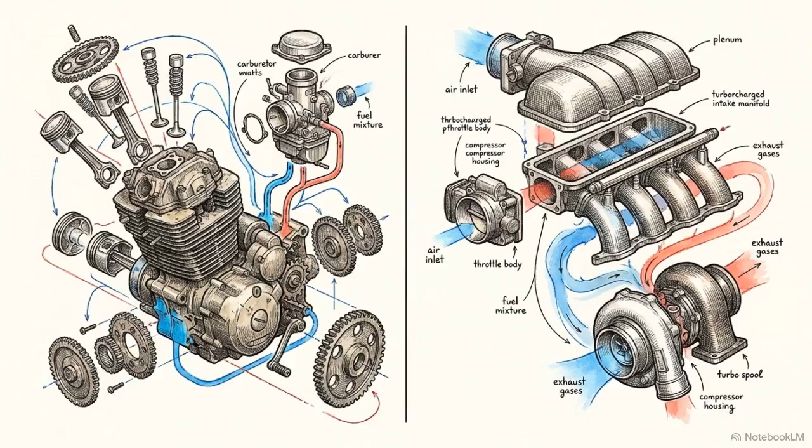The transition to E20 fuel involves modifying the combustion chemistry inside hundreds of millions of vehicles simultaneously, across a fleet ranging from 15-year-old BS3 motorcycles to modern turbocharged SUVs. The physical parameters of this change are strictly defined. E20 is a blend of 20% anhydrous ethanol and 80% motor gasoline.

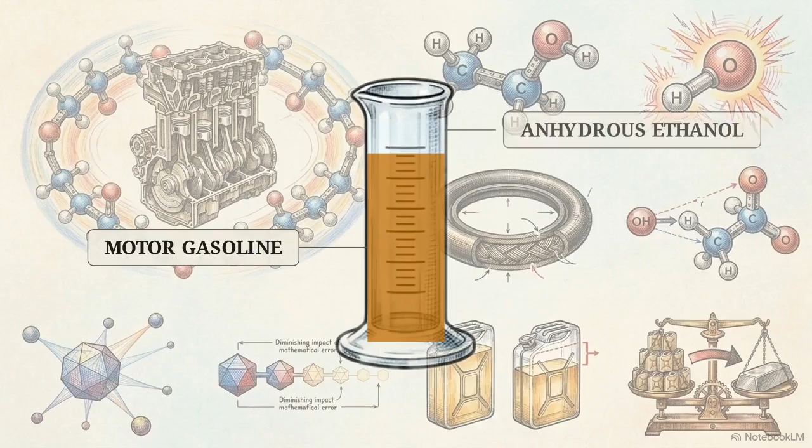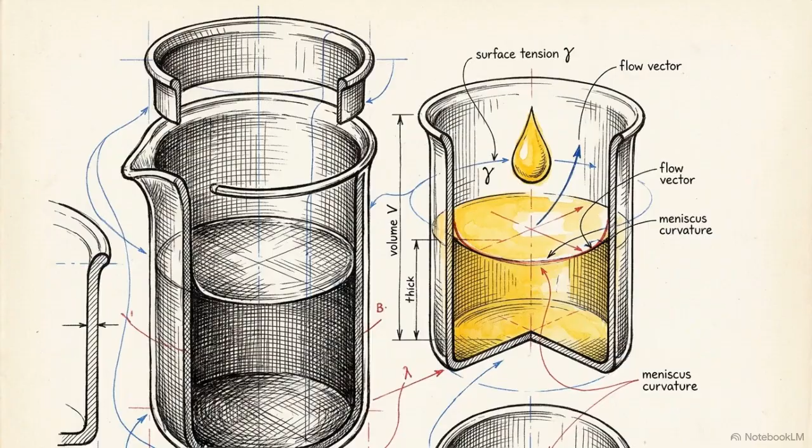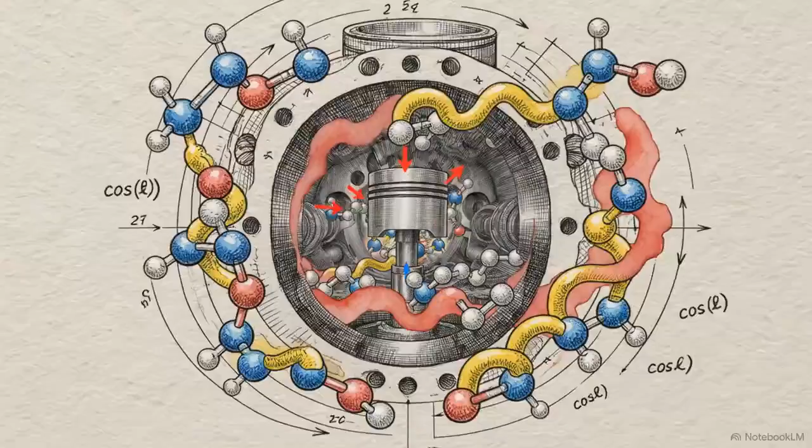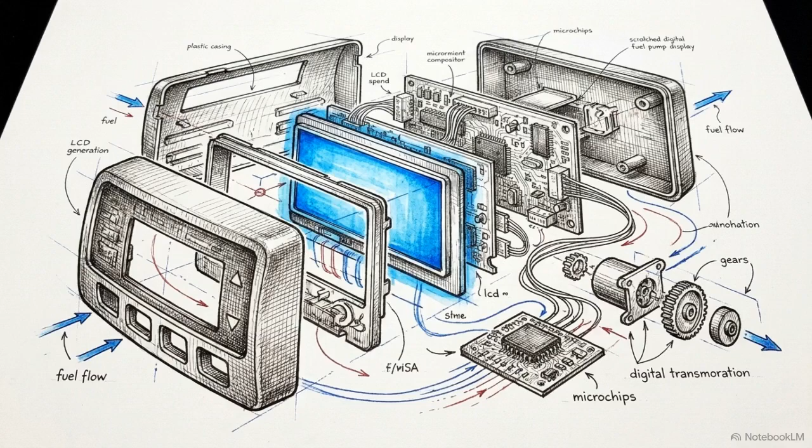To measure the impact of this shift, we have to track the engineering physics from the molecular level up, tracing the kinetics that suppress engine autoignition, the computational models required to simulate them, the physical degradation of the fuel system elastomers, and finally the macroeconomic cost of the thermodynamic penalty.

This rollout operates as a cascade of physical constraints. Every advantage extracted at the molecular level demands a precise, unavoidable penalty at the scale of the national economy.

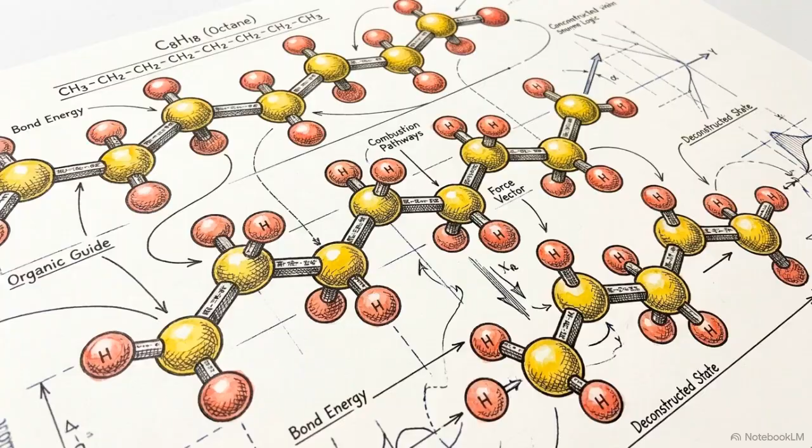In standard gasoline alkanes, low-temperature oxidation drives a volatile process called chain branching. The fuel molecules break apart and flood the cylinder's end gas with highly reactive OH radicals, triggering the spontaneous autoignition known as engine knock. Ethanol interrupts this sequence.

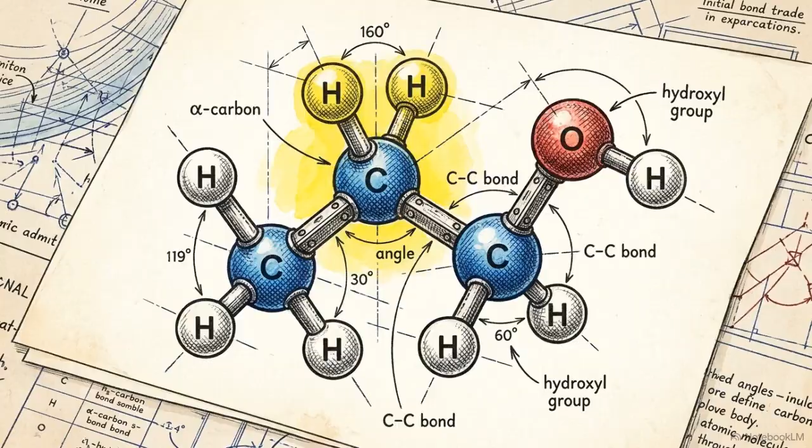Its molecular structure contains a specific vulnerability at the alpha carbon, the carbon atom attached directly to the hydroxyl group, where the carbon-hydrogen bond is notably weaker than the surrounding bonds. Because of this weaker bond, oxidation preferentially attacks the alpha carbon.

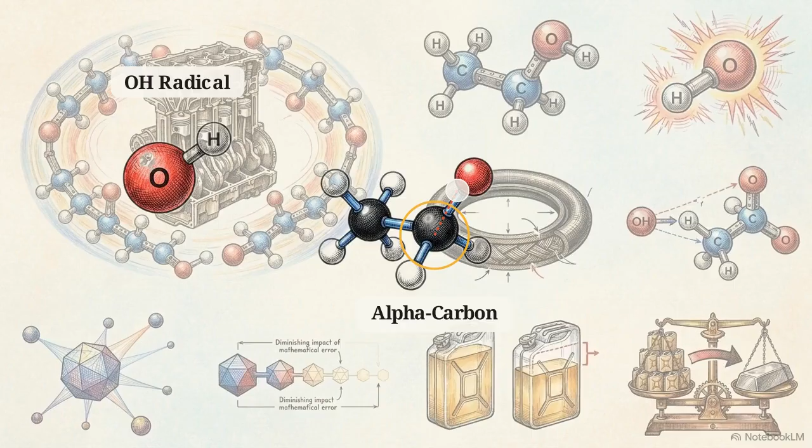When an OH radical encounters ethanol, it strips a hydrogen atom from this site to form an alpha-hydroxyethyl radical. That radical reacts rapidly with oxygen, but instead of branching, it decomposes into acetaldehyde and a single hydroperoxyl radical, or HO2. This pathway serves as a propagation step, not a branching step.

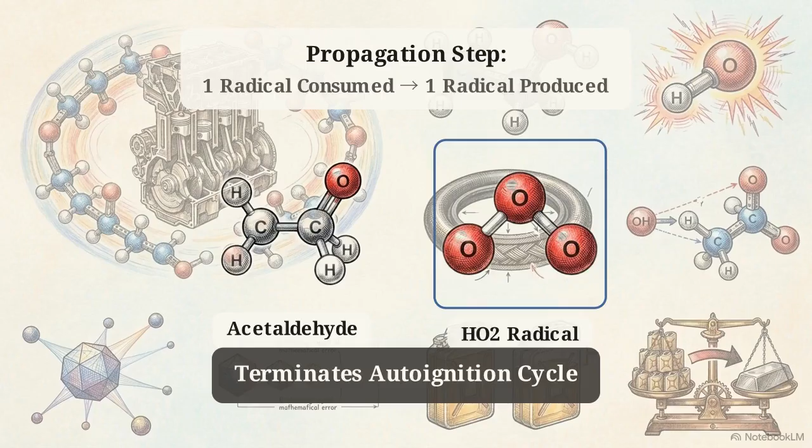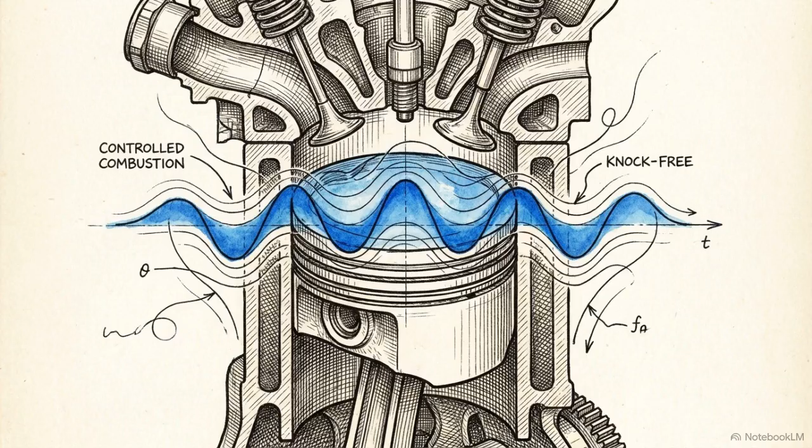It consumes the cylinder's available OH radicals without spawning new ones, which terminates the chain reaction and starves the autoignition cycle. This kinetic architecture is what gives ethanol its 108 octane rating. It acts as an active chemical scavenger, interrupting the combustion sequence to eliminate engine knock.

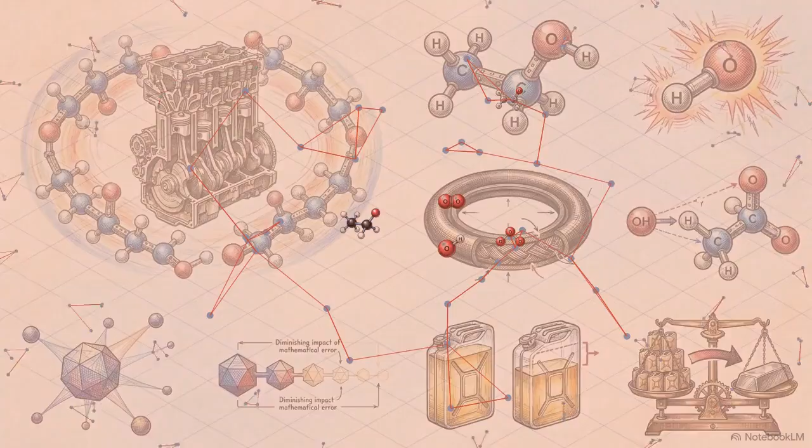To design engines that utilize this scavenging effect, researchers rely on detailed chemical mechanisms like Aramco Mech 3.0, a model mapping 581 species and over 3,000 distinct reactions. Dropping this model into a 3D fluid dynamics mesh would immediately exceed the capacity of modern supercomputers.

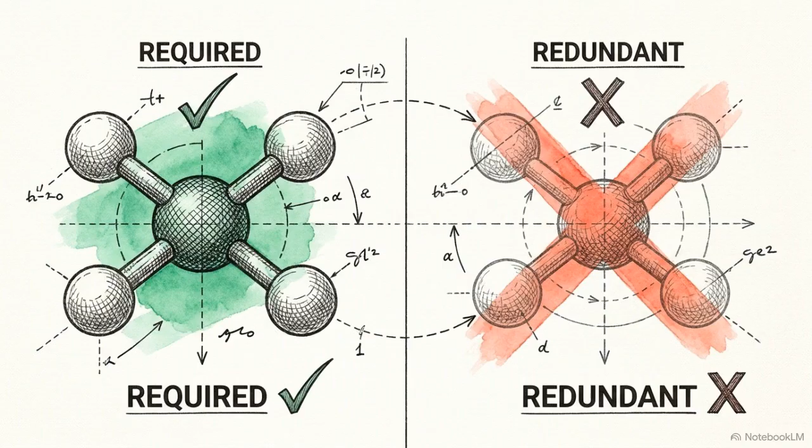Engineers shrink this model using an algorithm called Directed Relation Graph with Error Propagation, or DRGEP, which identifies which reactions are necessary for ignition and which can be removed.

The process begins by calculating a direct interaction coefficient, or RAB, between specific species. This quantifies the exact mathematical error introduced if one species is removed from the network. The algorithm then tracks how that error propagates.

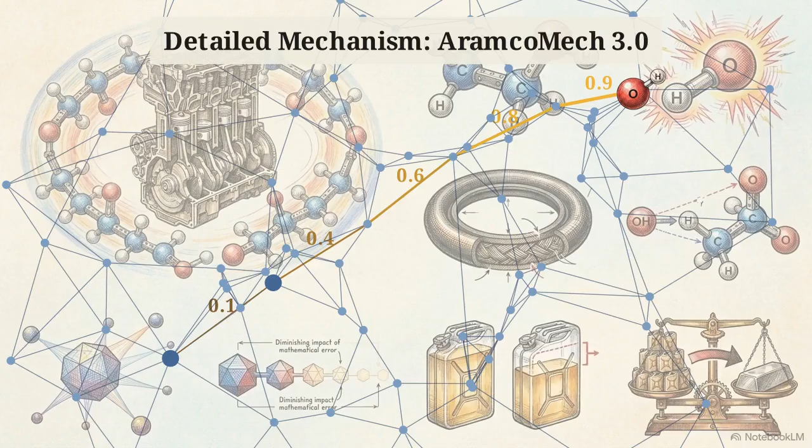As an error multiplies through a chain of intermediate species, its residual impact on the target diminishes, a process known as geometric damping. Once every pathway is mapped, any species falling below a user-defined error threshold is stripped from the model, along with every reaction associated with it.

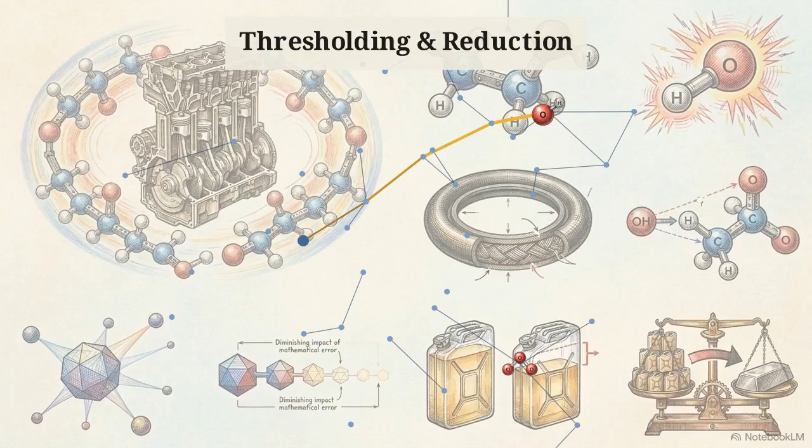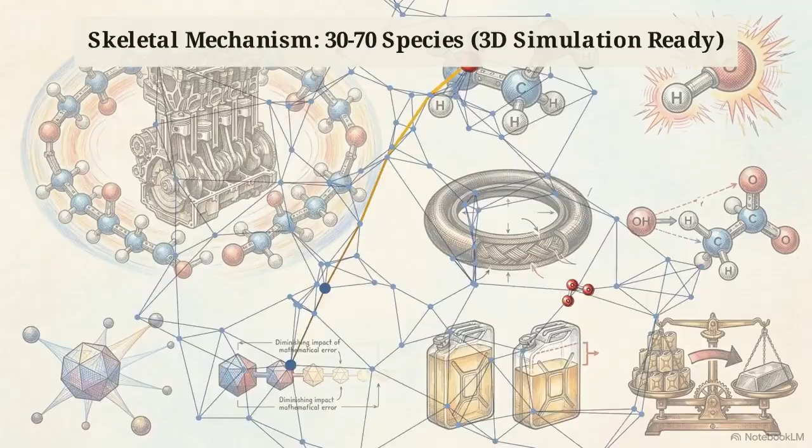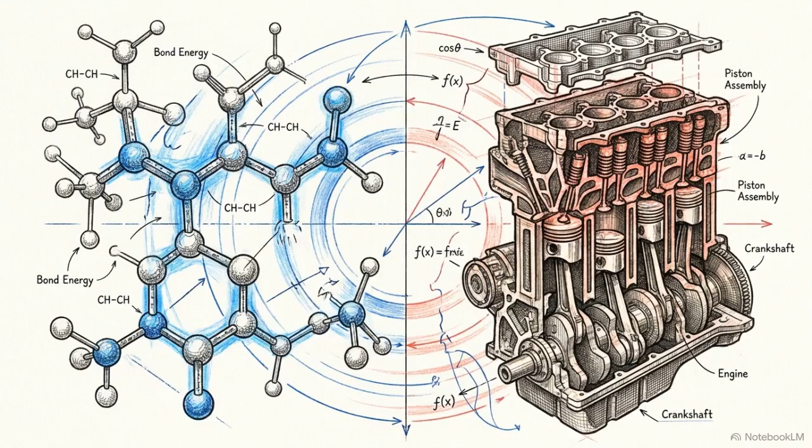The result is a skeletal mechanism of just 30 to 70 species. It is small enough to run in a 3D simulation, while remaining accurate enough to predict the critical HO2 pathways and ignition delay. DRGEP translates raw molecular chemistry into practical, mathematically viable models for physical engine design.

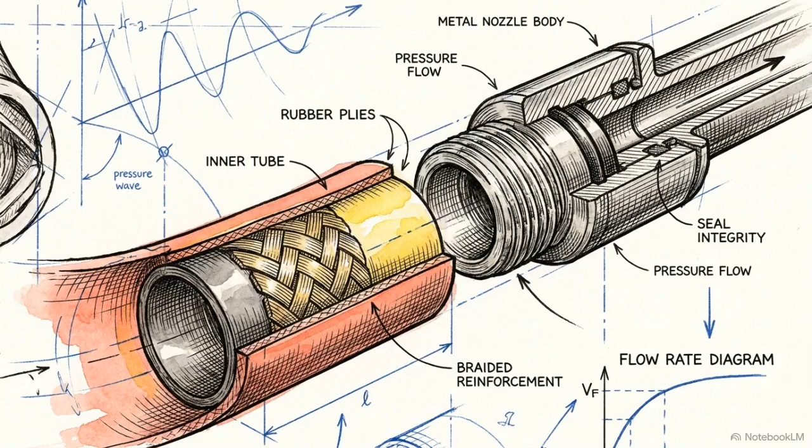Designing for E20 requires moving from digital simulation to physical hardware. Because ethanol contains 35% oxygen by mass, it interacts differently with the elastomers and metals found in mass-produced fuel systems.

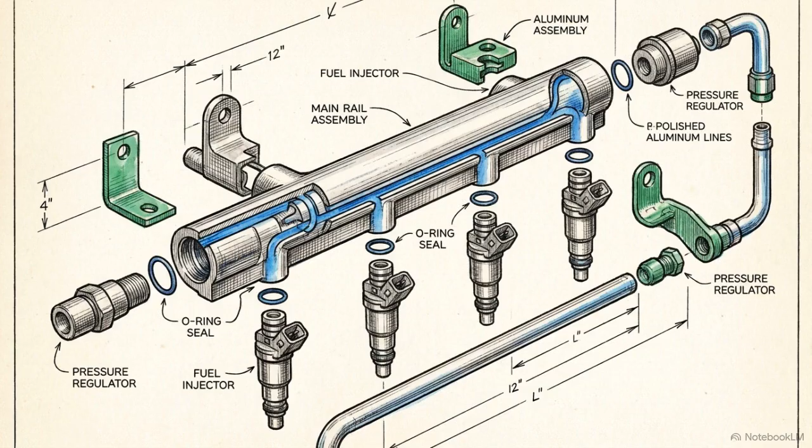ARAI laboratory studies using SAE J1747 protocols found that metallic components are generally robust, showing statistically insignificant corrosion rates when exposed to 20% ethanol blends.

Because of ethanol's polarity, older rubber compounds like NBR-PVC, and epichlorohydrin experience dramatic swelling and a severe loss of tensile strength after prolonged exposure. Engine durability tests confirm that while core engine blocks remain robust, these soft components are the primary failure points.

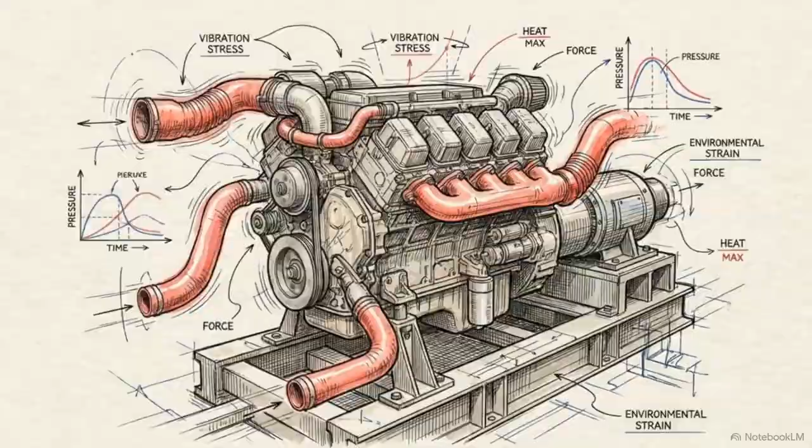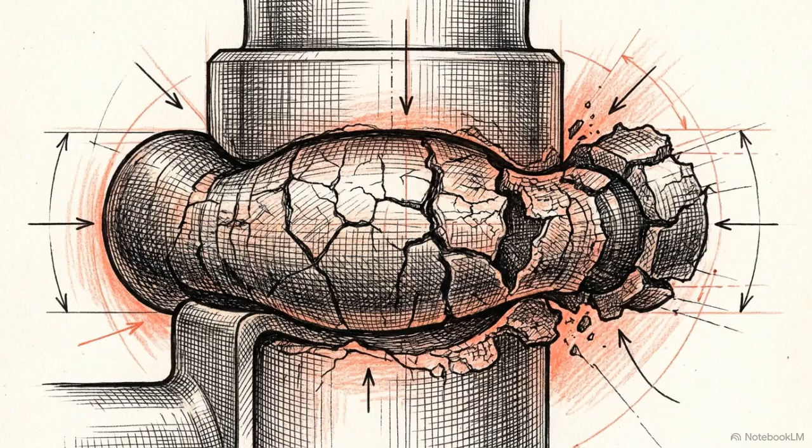Isolated issues like exhaust valve damage were observed in high-stress turbocharge tests, but manufacturer data shows no widespread catastrophic failures across the fleet. E20 does not destroy physical engine blocks. It acts as a targeted accelerant for the degradation of polymer seals and hoses in legacy vehicles built before 2023.

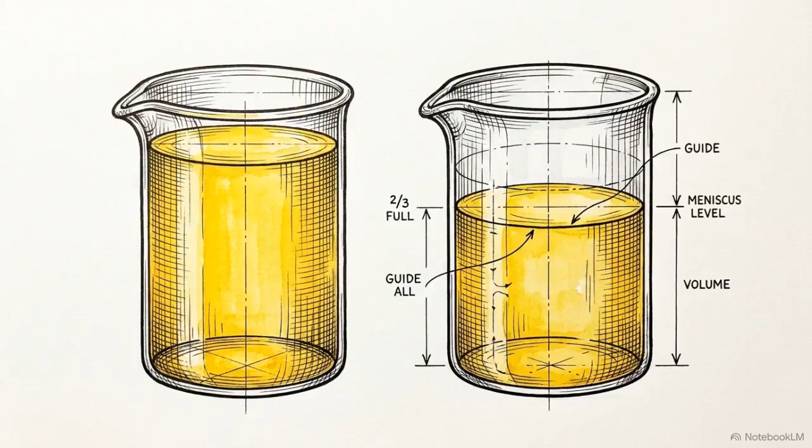Beyond material wear, the E20 transition is governed by a rigid physical constraint, volumetric energy density. Because ethanol contains bound oxygen, it carries roughly 33% less energy per unit of volume than pure motor gasoline.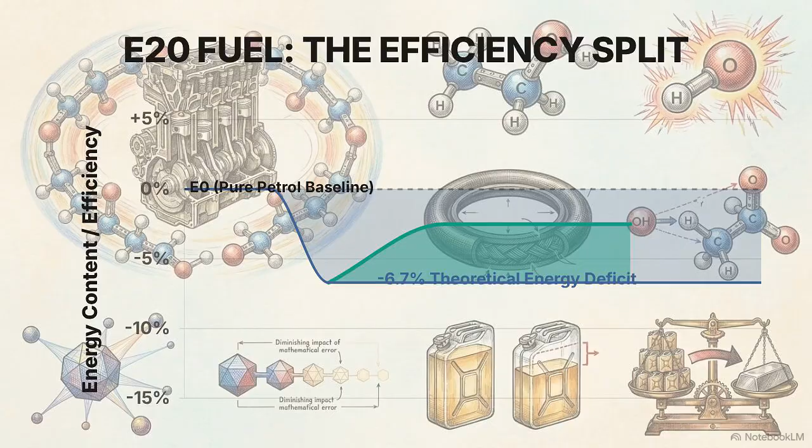Modern E20 calibrated engines utilize the fuel's knock resistance to advance spark timing and increase compression, clawing back efficiency and limiting the mileage penalty to between 1 and 4%.

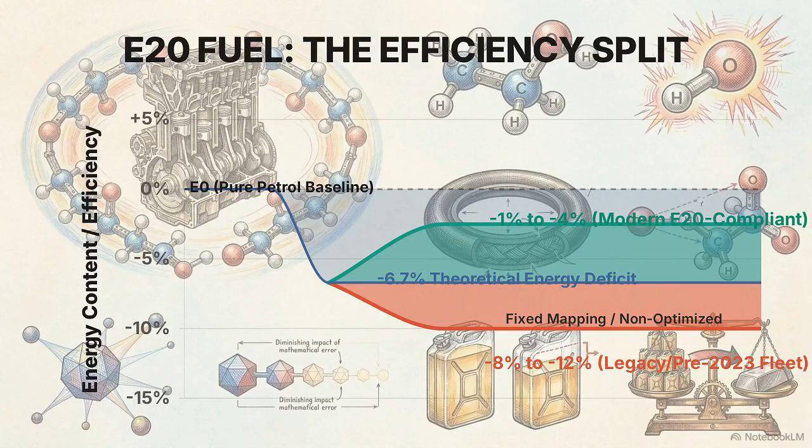Older engines with fixed fuel maps cannot adapt to these new kinetics. They must absorb the full volumetric deficit, resulting in real-world mileage losses of 8 to 12%. The molecular advantage of ethanol's knock resistance creates an inherent energy penalty that disproportionately affects older, non-optimized engines.

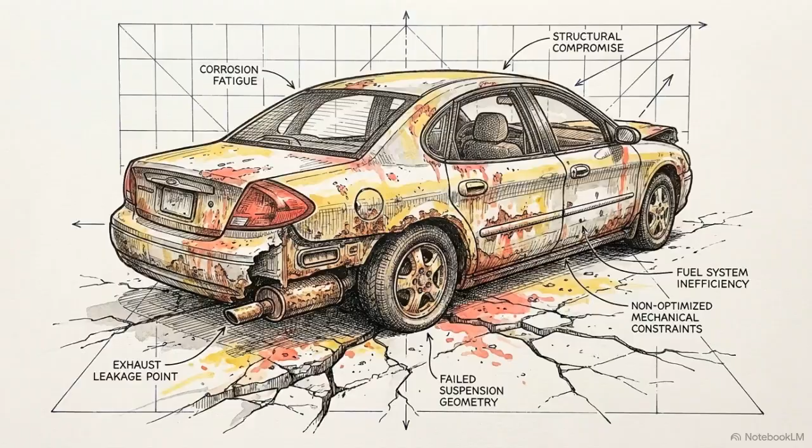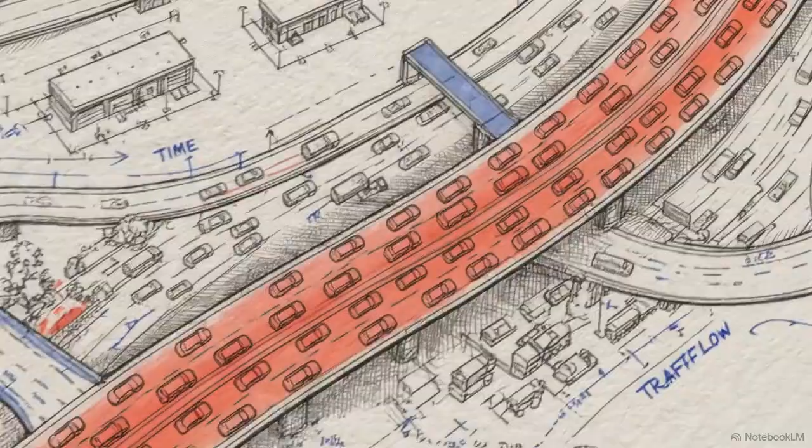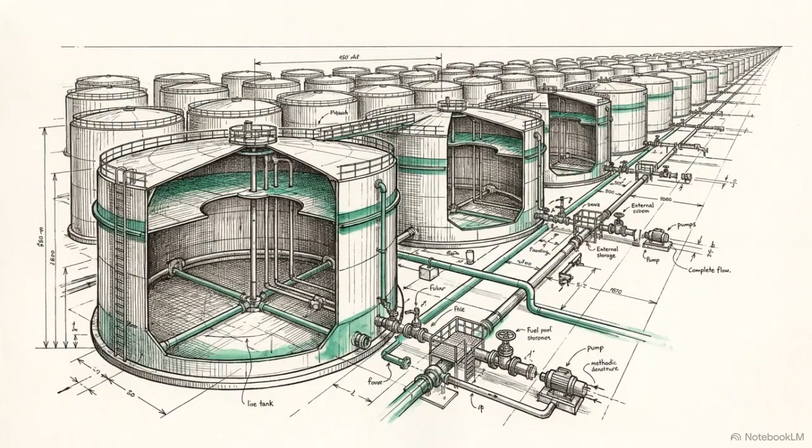Over 3 years, the incremental mileage loss across the national fleet translates into a massive volumetric deficit. Between 2023 and 2026, as blending rose to 20%, the energy density gap forced the purchase of an estimated 6.57 million extra metric tons of fuel to cover the same distances.

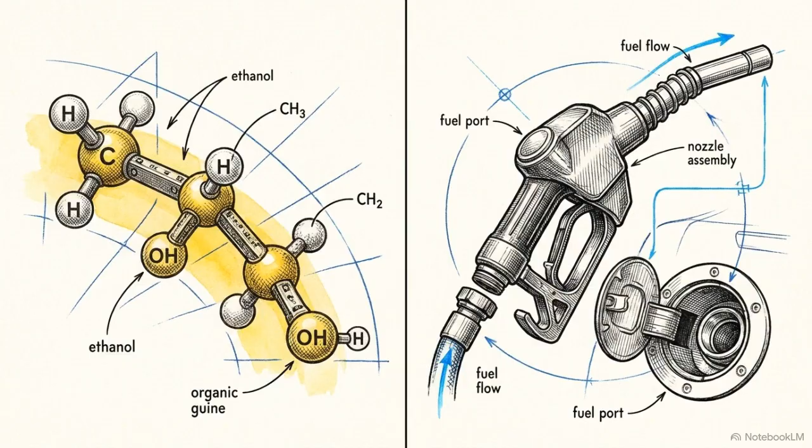The state successfully reduces its reliance on crude imports and shields the economy from oil shocks, but it does so by a mechanism that shifts the physical energy deficit directly into the individual motorist's cost per kilometer. This integrated system starts with alpha-H abstraction suppressing molecular knock and ends with the consumer paying the thermodynamic deficit.

The E20 rollout confirms a fundamental law of macroscopic engineering. There are no perfect, frictionless thermodynamic solutions, only highly optimized multi-scale compromises.